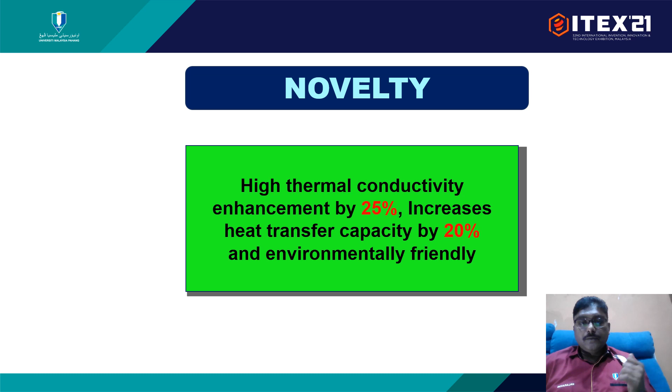The places that we can use these coolants is for machining, for semiconductor application, for power plant cooling, and for automotive. We are using automotive as our main platform because engines are vastly available in the world and people are using it for cooling. Even the latest hybrid and electric vehicles also require cooling systems, and as such the coolant will be feasible for all these systems.

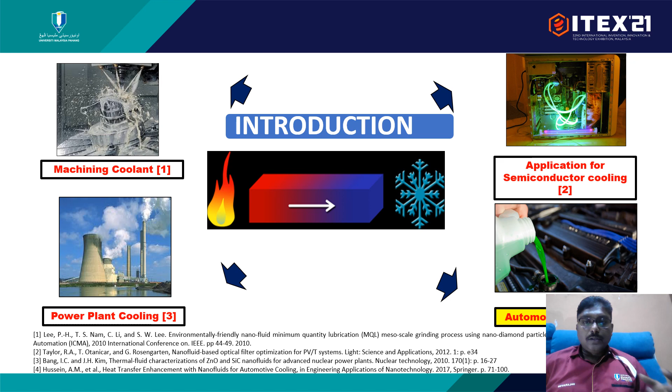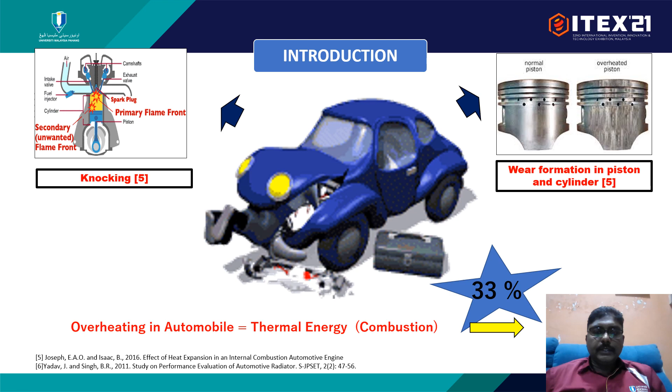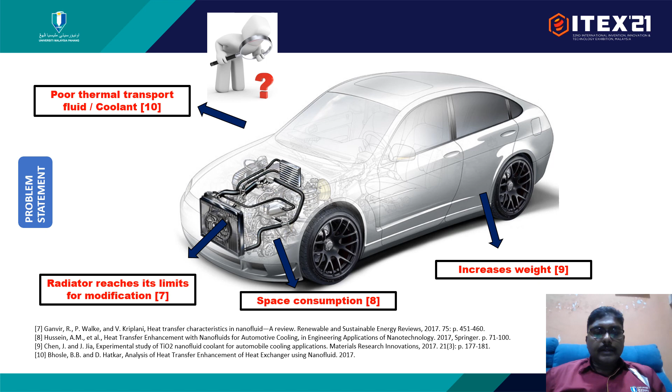For internal combustion engines, wear in the piston and knocking occurs due to the amount of heat that is dispersed from the thermal energy. So we need to somehow reduce this by using a proper coolant in the system. The cooling systems for the internal combustion engine or any heat engines is due to the radiator, and the radiator itself has reached its limits for modification, and it is actually consuming a lot of space and weight of the vehicle. So to decrease the size of the cooling system, we can modify the heat transfer of the coolant itself because it has poor thermal transport, and the modification will serve as a design improvement for the vehicle.

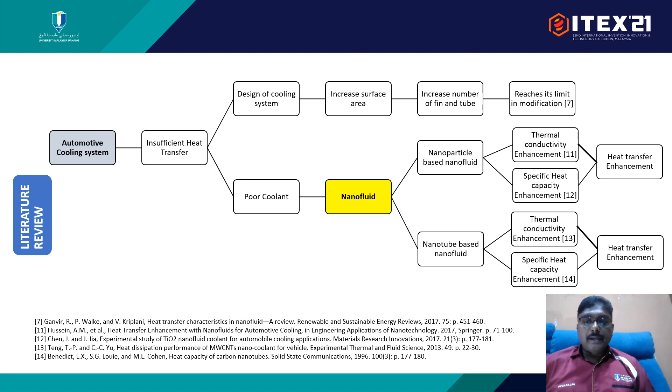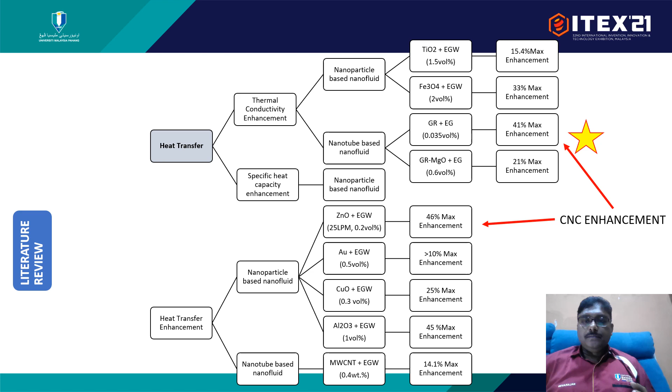So these are the literature that we found for the nanofluid in the automotive systems. The general outcome of the nanofluid is to select the nanosubstance, the preparation of the nanofluid, and the stability of nanofluid has to be done. So with this, we can find out which is the best way to introduce nanofluid into the system.

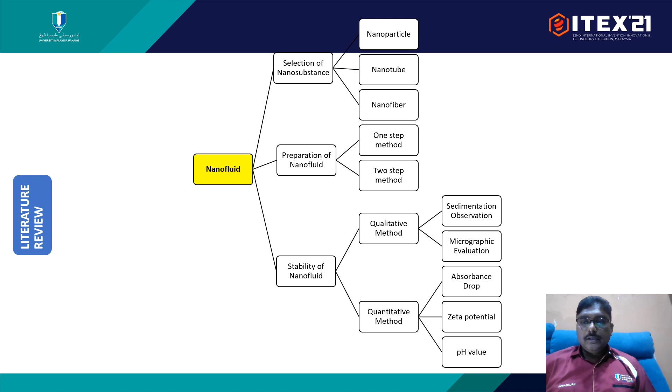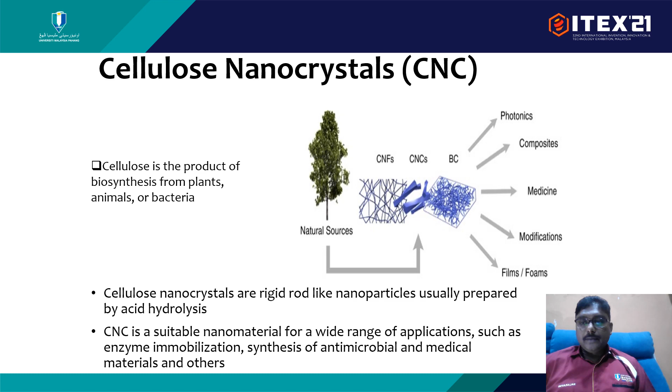So we have found that graphene, which is used in solar cells and also batteries and supercapacitors, is one of the great substances to increase the heat transfer. And cellulose nanocrystal, which is a product from the biosynthesis of animals and bacteria, is also another high-end material for heat transfer increments. To produce cellulose, we can use wood flour. From the wood flour, it can be acid hydrolyzed into the cellulose crystals.

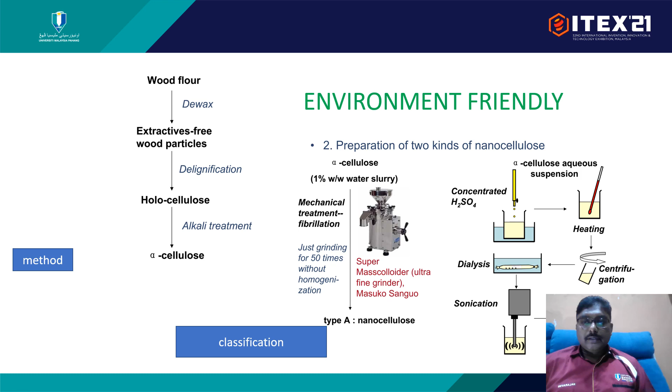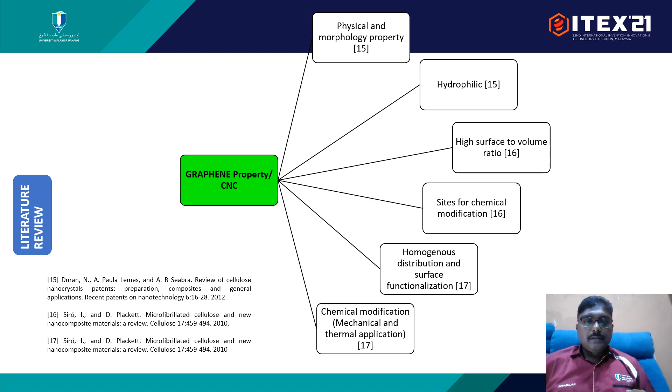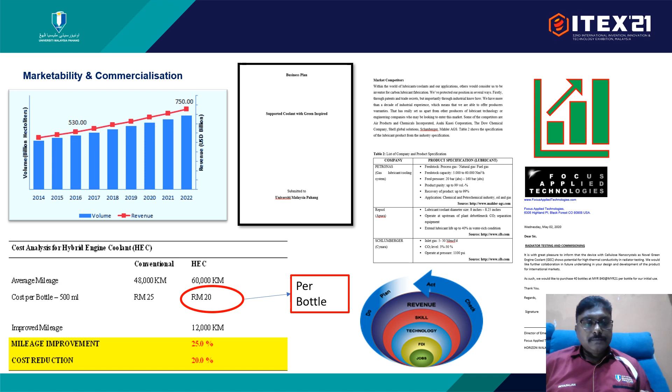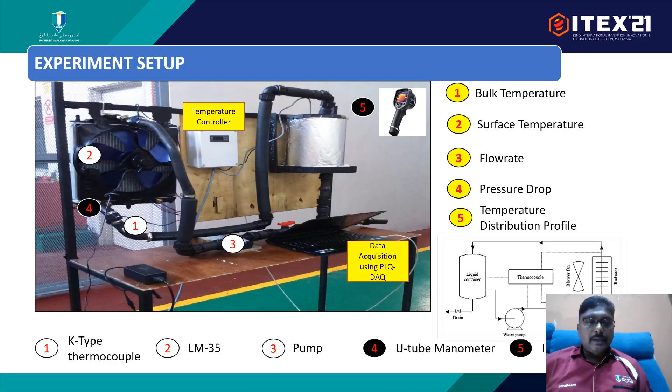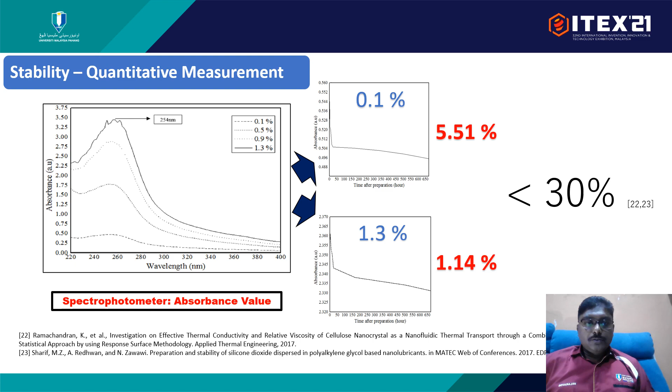So this is the stability measurement for 1 month. Then we have done the spectrophotometer absorbance test to show that it is stable. We have also done the 4 thermal conductivity, dynamic viscosity, specific heat, and density experiments.

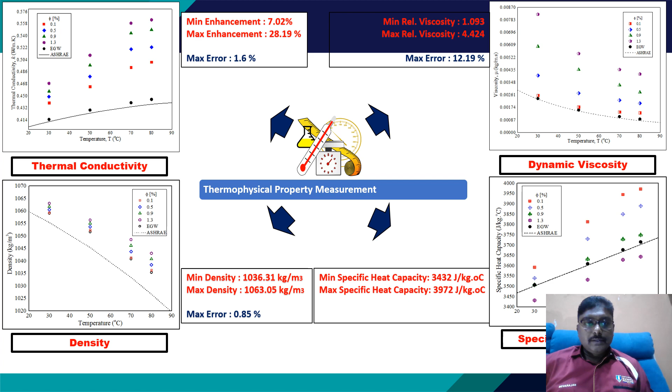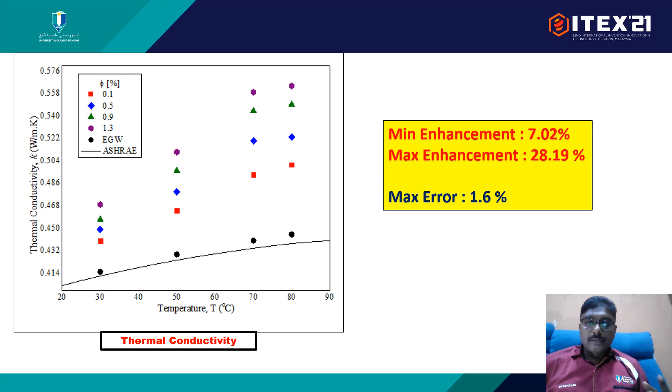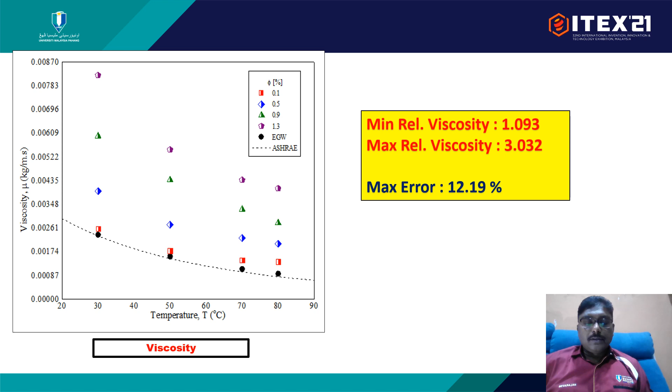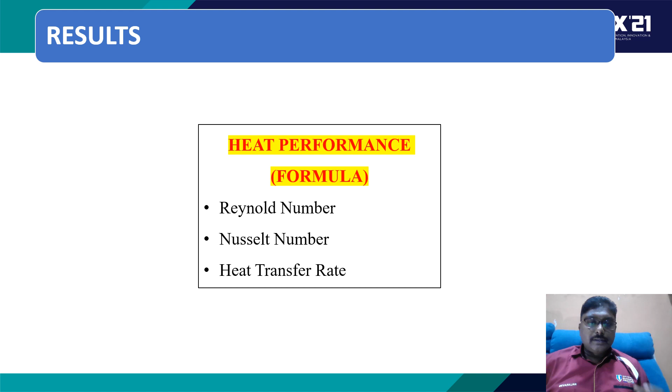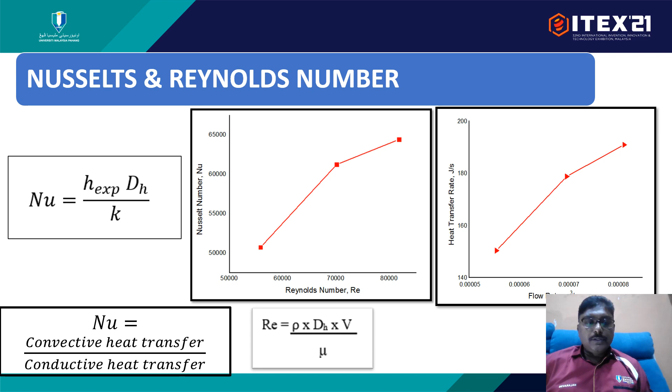And density also reduces when you add the particles and the temperature is increasing. And as such, the specific heat also is increasing as compared to the base fluid. So when we look at the results, we are having Reynolds number, Nusselt number, and heat transfer results. When we plot all these results, we found out that the Nusselt number increases with the Reynolds number.

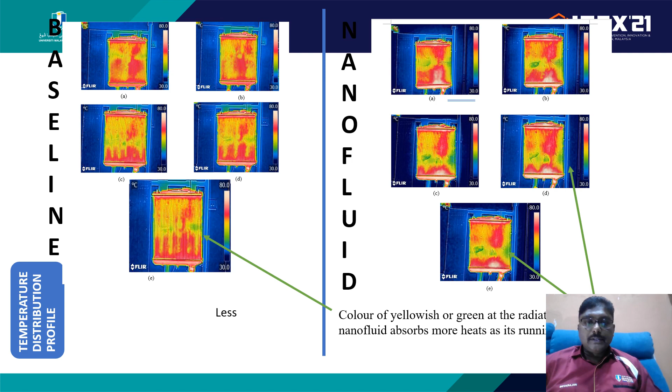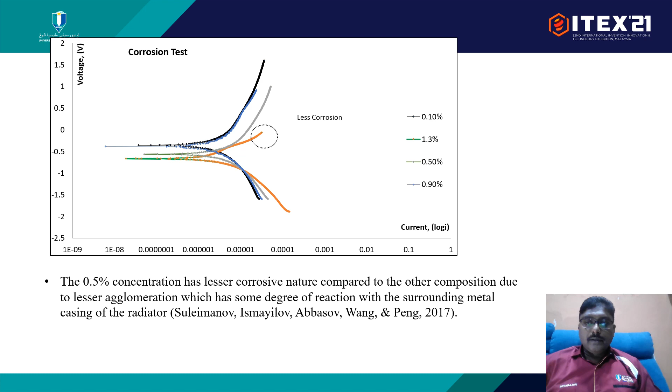This shows that the heat is distributed into the radiator fins. And when we look at the thermal camera images, we found that the green yellowish dots at the center of the radiator has more green color, and as such it can show that it can remove more heat from the system. For the corrosion test, we found that the 0.5 percentage has the lesser corrosive nature compared to other compositions, due to the lesser agglomeration which is occurring, as shown from the TEM analysis.